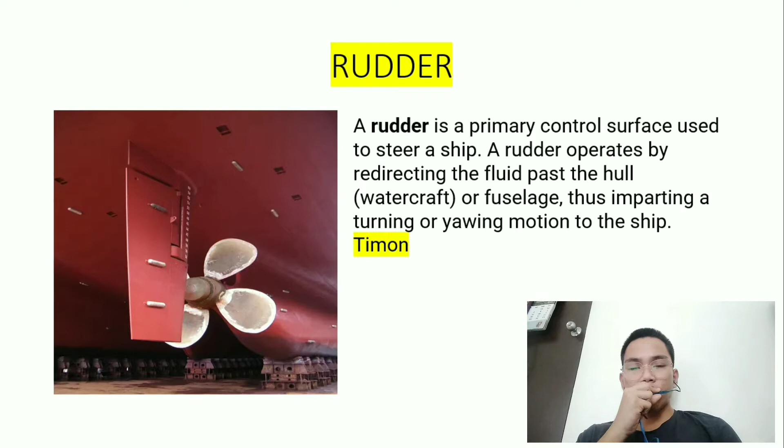Rudder. A rudder is a primary control surface used to steer by directing the fluid past the hull, watercraft, or fuselage, thus imparting a turning or yawing motion to the ship.

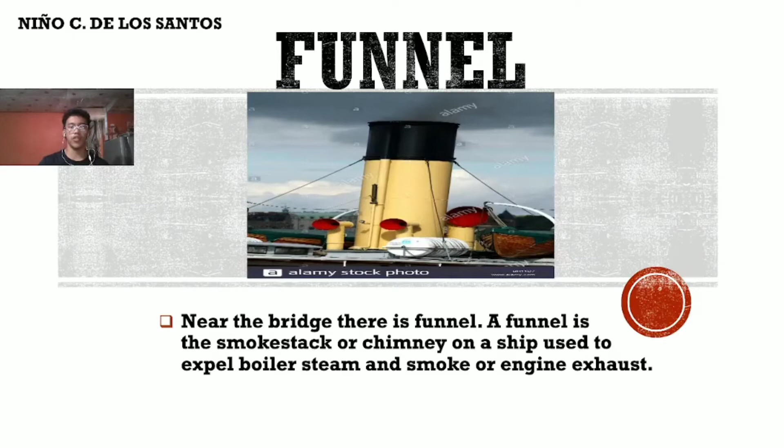First is funnel. Near the bridge there is a funnel. A funnel is the smokestack or chimney on a ship used to expel boiler steam, smoke or engine exhaust.

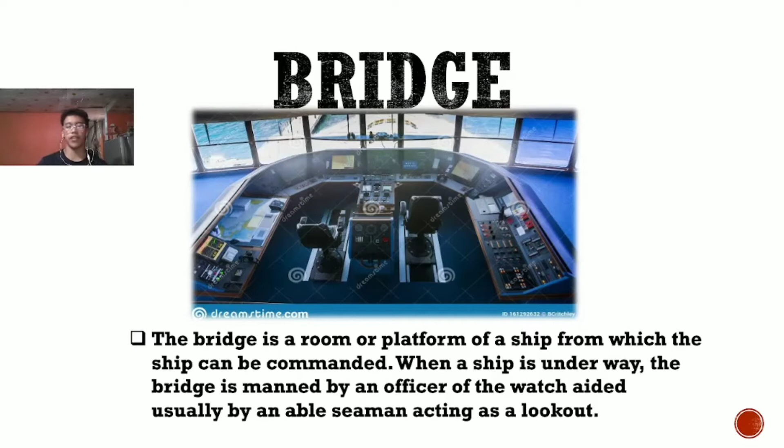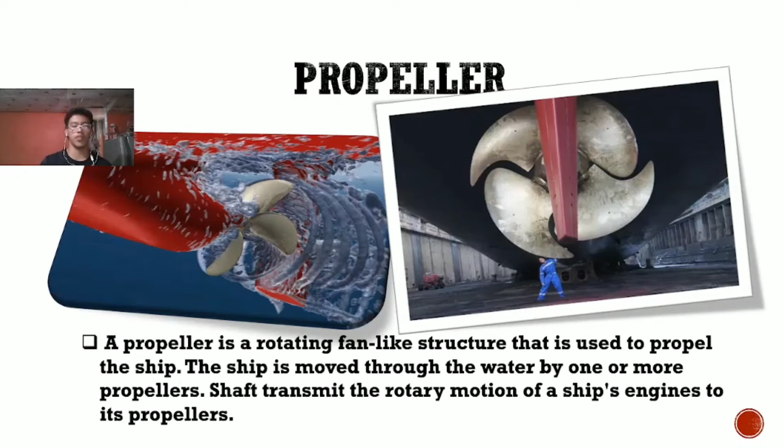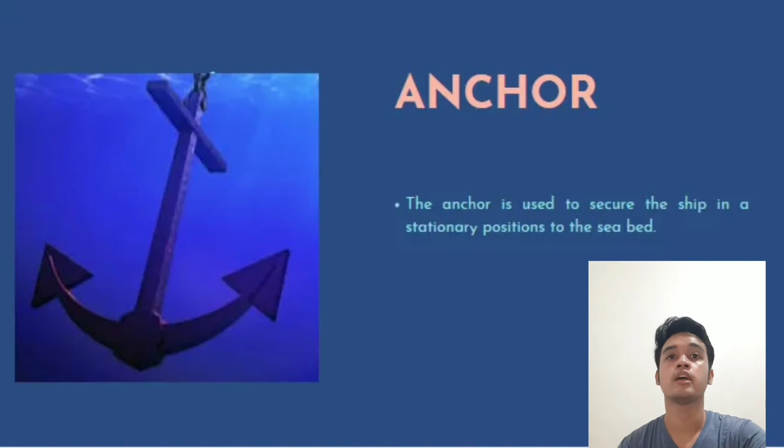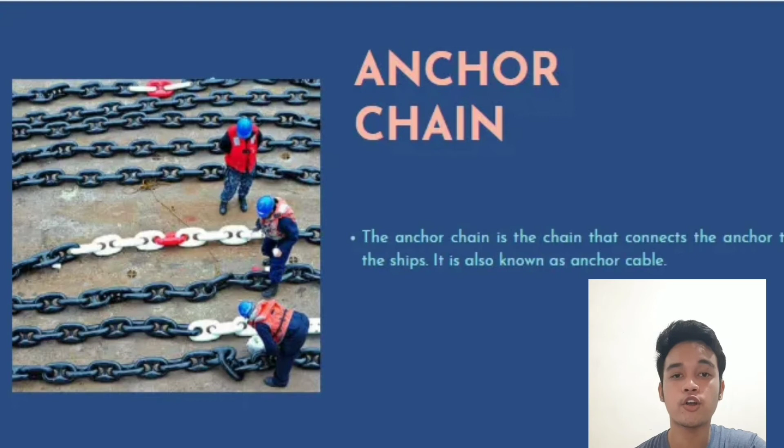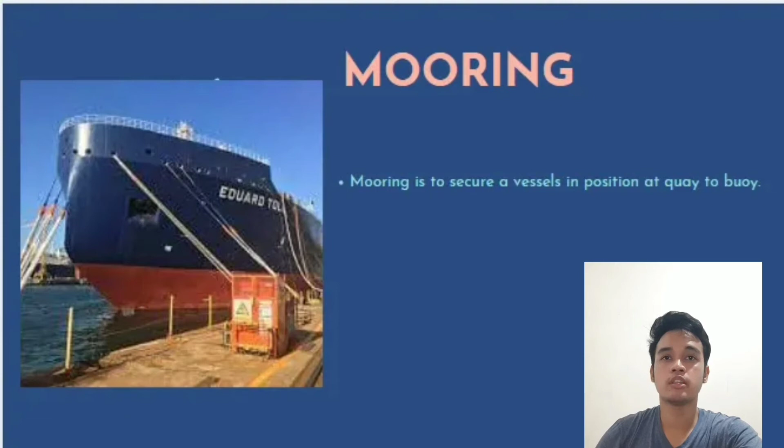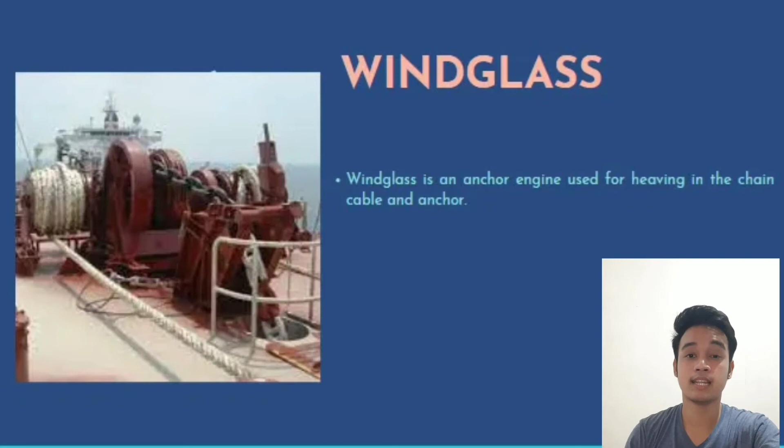Bollard. Bollards are vertical posts used for securing hawser, mooring ropes, etc. They can also be called bitts.

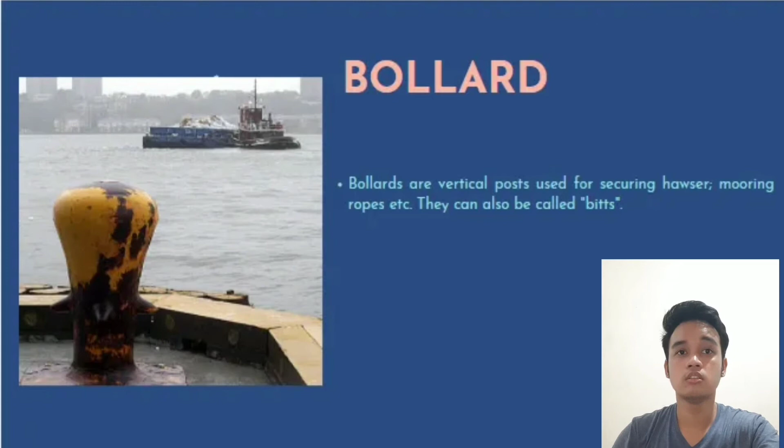Capstan. Capstan is a vertical revolving cylinder. It is placed on the forecastle, used for heaving the cables and mooring ropes.

And it is still a warping drum rotating on a vertical axis for the handling of mooring lines and optionally anchor cable.

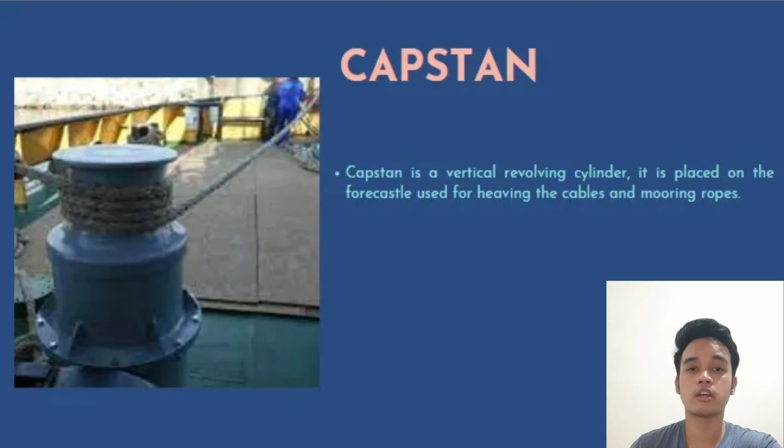First one is superstructure. A superstructure is an extended construction of any building or platform that rises above the rest of the building or platform in a distinct manner in the ship.

The word comes from a combination of two Latin words. The Latin prefix super means in addition to, or above, or in excess of, whereas the stem word structure means to build or to heap up.

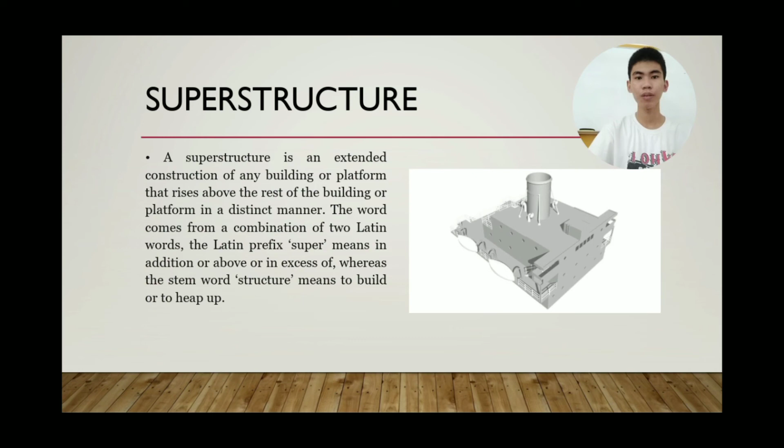So the next one is the bulbous bow. A bulbous bow is a protruding bulb at the bow of a ship just below the waterline. The bulb modifies the way the water flows around the hull, reducing drag and thus increasing speed, range, fuel efficiency, and stability.

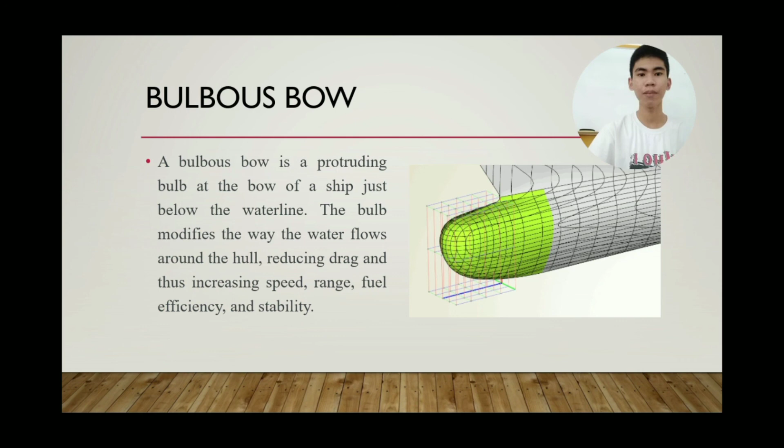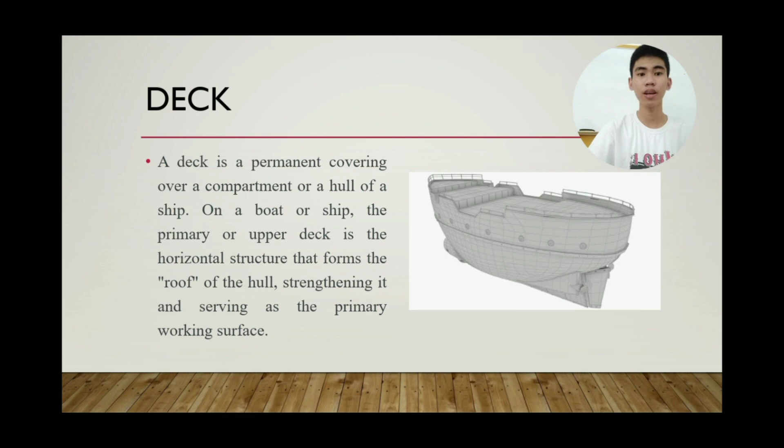So the third one is the deck. A deck is a permanent covering over a compartment or a hull of a ship. On a boat or ship, the primary or upper deck is the horizontal structure that forms the roof of the hull, strengthening it and serving as the primary working surface.

So the last one is the hull. A hull is the watertight body of a ship, boat, or flying boat. The hull may be open at the top, or it may be fully or partially covered with a deck.

The line where the hull meets the water surface is called the waterline. So that's all, thank you for listening.